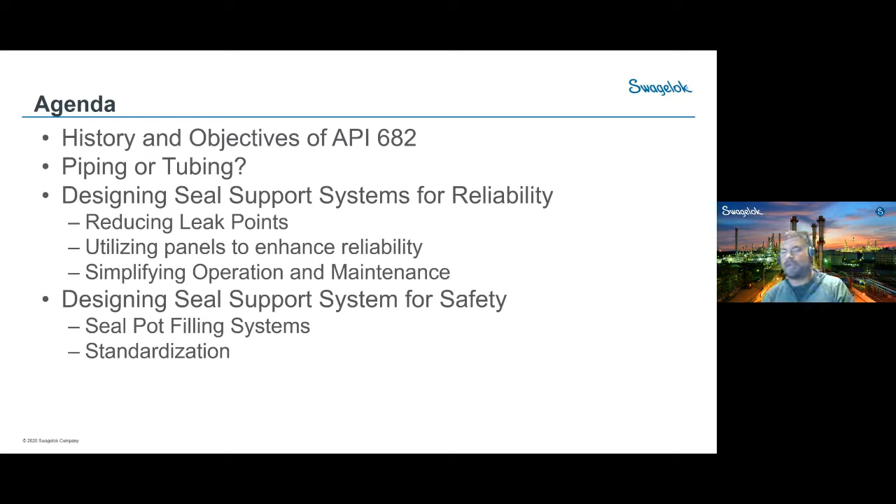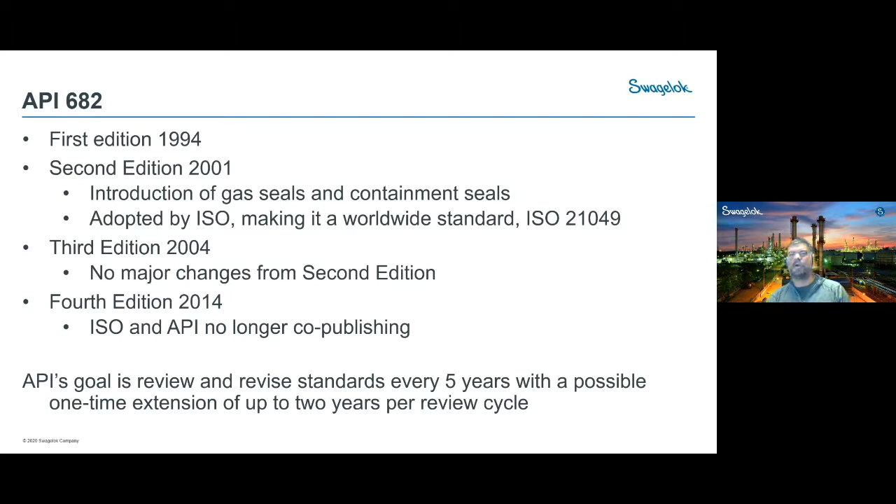Okay, just a brief history on API 682. It's only about 20 some years old. 1994 was the first edition. For a period of time, ISO and API were collaborating. They are no longer doing so and not co-publishing any longer. So really what we have is kind of the global standard right now. I don't hear ISO referenced so much, pretty much around the world. Anybody dealing with petrochemicals is discussing API 682. All right, we're expecting a new version of the standard sometime in 2021, 22. They really try to update that about every 5 years.

Okay, I think the first thing when we talk about 682, that's a good thing to start with, is that it's not a code. It really is a place to share best practices. A lot of guys will say, hey, we got to follow exactly what's in API 682, but I think what we'll talk about in this presentation is a little bit about where you may decide to deviate or make changes or improve upon some of the suggestions in API 682. All right, we always start with API because it is the gold standard for seal support systems. And then if we deal with an ANSI application, some chemical plants will have that, both API and ANSI applications.

The discussion here is relevant for ANSI systems as well. You just may be able to change some of the componentry around, as typically ANSI service is not as heavy duty as API service.

As you know, Swagelok does not make a pump, does not make a mechanical seal. That is not our core competency. What we are really good at is designing and building systems like seal support systems for the conveyance of fluid and gases.

So basically anything 2-inch and under is in the wheelhouse of what Swagelok does. So today we're going to focus on really the seal support systems, which is a key aspect of seal integrity itself. I look at two sections, section 8, which gives me all my guidance on what type of accessories I need to use and key considerations for things like sizing, seal pots, etc.

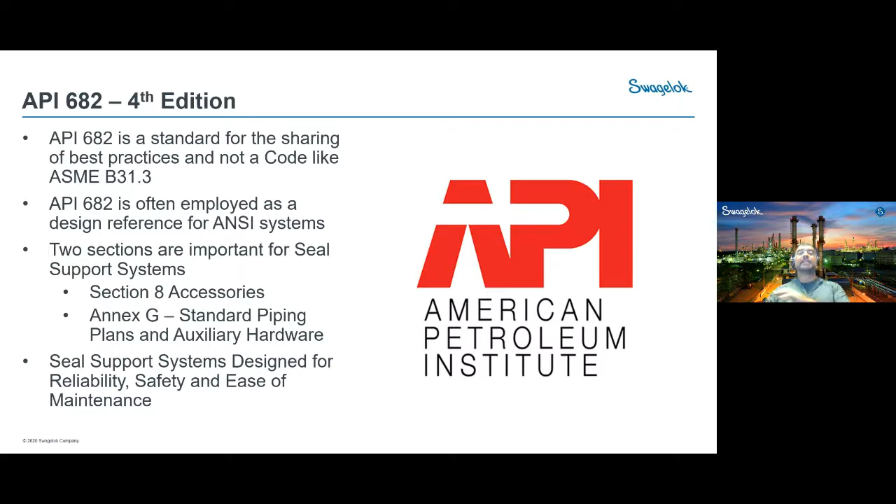Throughout the entire standard, there's a big focus on designing these systems for reliability, safety, and ease of maintenance. So three big considerations for us there.

I did want to highlight one thing because we are seeing tubing being used in these systems quite often. This is an article from Hydrocarbon Processing, by a gentleman I worked with, Heinz Bloch. He's fairly well known in the industry, worked for Exxon for a number of years, and is a real guru of rotating equipment. He's a real advocate for using tubing in seal support systems.

So when you look in the back, it says piping plans. Well, now designers have a choice: do you want to use piping or do you want to use tubing? And certainly we see the major seal manufacturers and pump vendors using a lot more tubing.

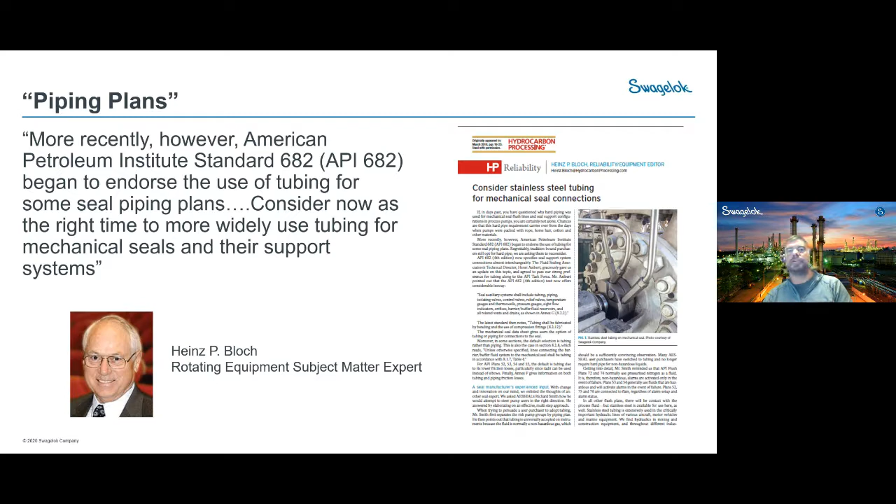This is traditionally a little bit heavier wall than we use for the pressures and temperatures we would typically see in seal support systems. API likes to beef up the wall a little bit, use a heavier wall tubing not for pressure containing inside the tubing, but really for external robustness. These are around pumps, equipment, and they certainly don't want a guy putting his hand or foot on something. So they really want to have external rigidity with that extra heavy wall thickness.

I bring it up here because if your guys are going into the storeroom and just grabbing tubing, they just want to pay attention to the wall thickness and not grab instrument wall thickness tubing, which would have a thinner wall on it. You'll also notice there's no guidance for tubing below 1/2 inch.

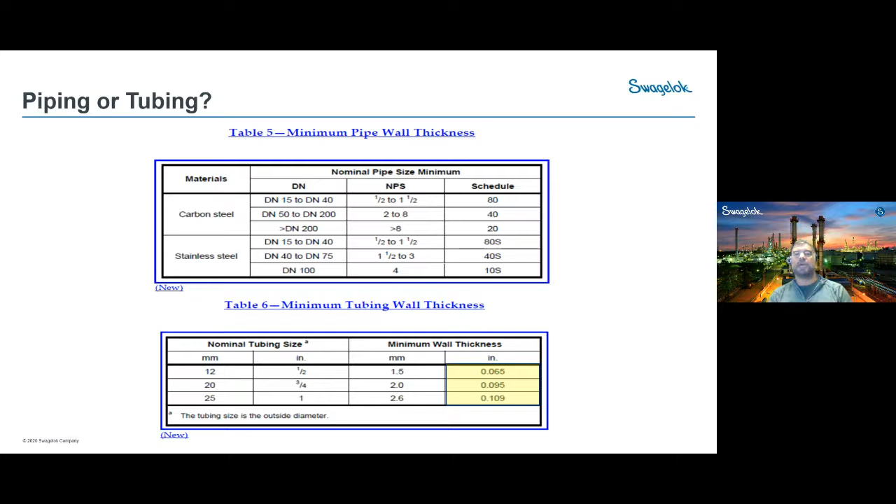That we typically see on gas seal plans like 72s and 74s. We just size that wall appropriate to the pressure and temperature service. And same goes for over 1 inch. We have a lot of OEMs using over 1 inch tubing on compressor systems or pump systems, and then we just size that wall appropriately for whatever application they have.

Well, it's an orifice and a strainer. So I look in the back. One of the things below the ISO diagram that I find very helpful is the text that they have talking about considerations for it. One main consideration for this design is that it has not been proven to have a 3-year successful operating life.

Does that mean that we shouldn't use this plan or we can't use this plan? No, that's really not what it means. It's just saying, hey, pay attention here. There's probably something on this design that needs servicing, and in this case, it's going to be the strainer. That's a reliability concern. If we don't have the proper preventative maintenance plan to blow that down, it can become clogged and then affect the flush flow in my plan 12.

So I always look in the back just to see, hey, are there maintenance considerations with these plans?

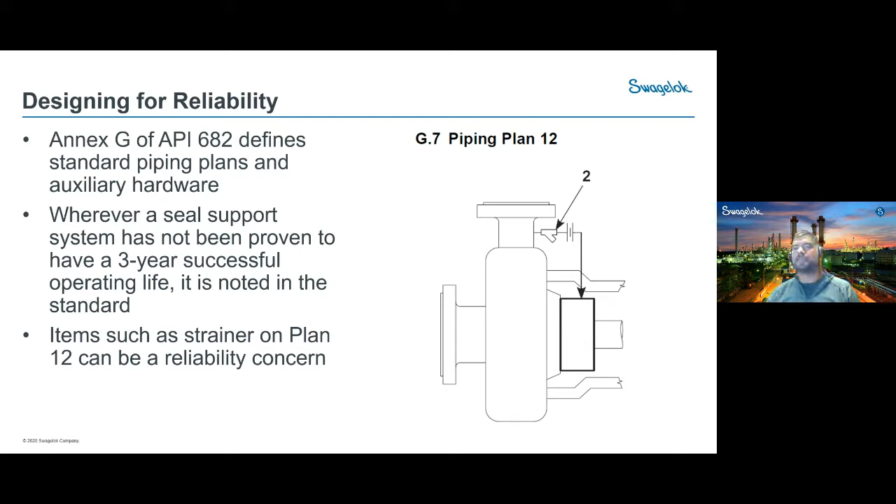With designing for reliability, we want to reduce leak points wherever we can. That's a big concern. Whenever I go throughout the world to Asia or Europe, we're always looking at reducing any potential leak points. So we want to always look at these designs and say, hey, where can I engineer out potential leak points?

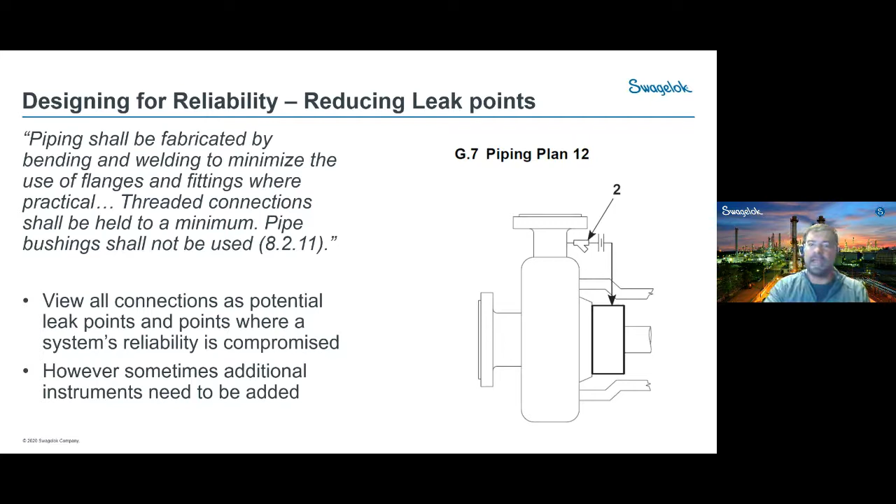However, we also want to consider that these systems don't have to be static, and sometimes I might need to add additional instrumentation. Just because API says it's this way in the back of the book, if I'm having problems with this system, it might be necessary to add additional instrumentation. So I'll give you an example here.

This is a plan 12. This was at a customer site. They had to change the design because they had issues with that strainer clogging. So for a period of time, they added gauges on either side of the strainer to measure how frequently it clogged, and they found that it clogs about once every 3 months. So they wrote the preventative maintenance down so that they would blow that strainer down every month or two.

After they diagnosed this problem, they removed those gauges, reduced those potential leak points, and plumbed right back into that strainer. So it's quite possible to think about API as, this is the way we want it to be, but at some points I may have to actually add additional instrumentation as a diagnostic tool. And then there's no problem removing that later once I've figured out whatever we need to figure out.

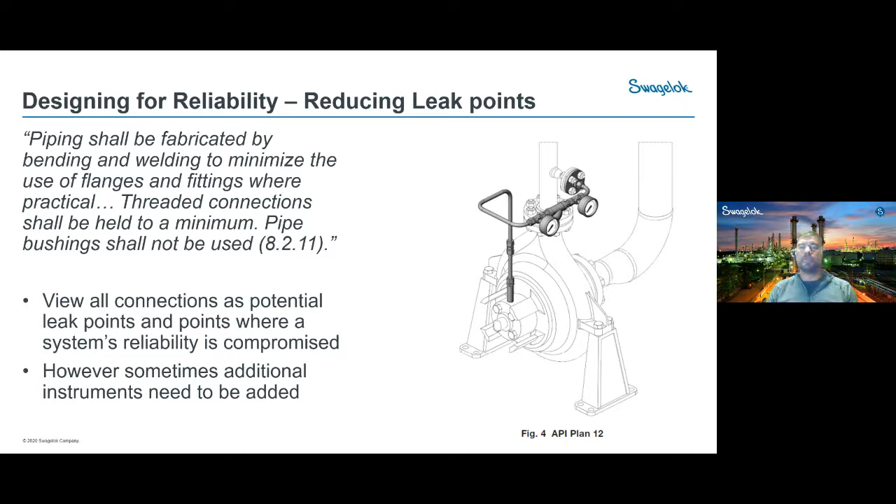Just to give you guys some more pictures, this is from a fracking field in southeastern Ohio where they're taking gas out of the ground, doing a little bit of light separation and processing before putting it into a pipeline. This plant was less than a year old, and already I'm seeing some issues. They were having some problems around pumps, even in a relatively new plant.

What you're seeing here is a 5211, so it's a seal pod on the left, and then you can see here I've zoomed in on the 11. Sometimes the gas was not clean. They had particulate in the gas coming out of the ground, so they had plan 11s that were clogging.

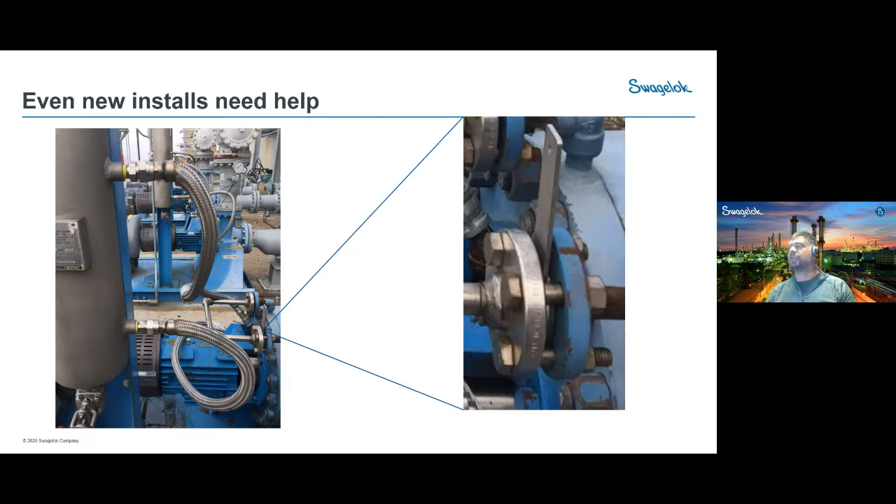Again, we see a plan 11 is just an orifice. If that clogs, the only way they knew about that would be to have a seal issue. So there's an opportunity there to add additional instrumentation if they were having clogging issues.

Next thing I'm looking at here is the connections into the seal chamber from the 52. We've got 1, 2, 3, or 4 fittings there. Again, we always want to use one fitting whenever possible, as few connections as possible around here.

We certainly don't want this to leak, especially in days like we're having today, where it's cold overnight, freezing, and then it thaws during the day. That expansion and contraction works at pipe threads, loosens them, and then you do get leaks. And this is really not a great place to have a leak.

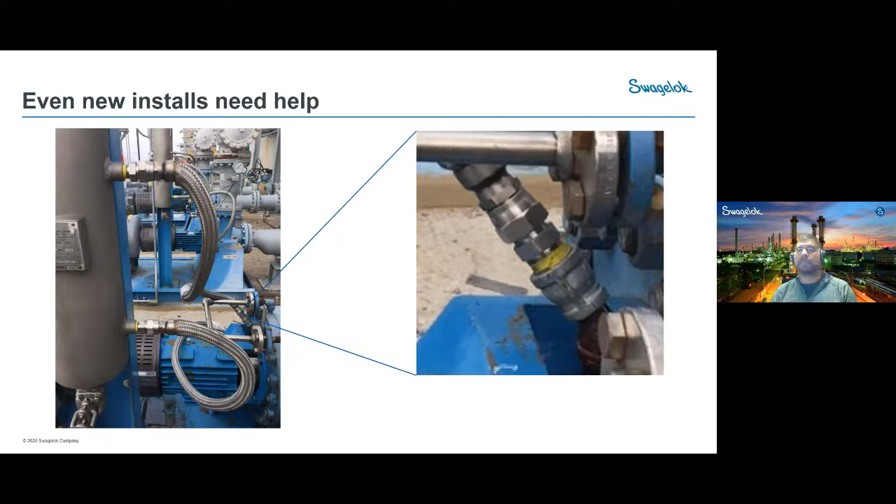And certainly the last thing I'm looking at here is this hose. API does not recommend using hoses in these applications. You can use them in ANSI, but for API, we always want to use rigid piping or tubing whenever possible. I don't know when that hose is going to fail. I just know it will fail at some point.

Certainly the routing of the hose is an issue, but whenever possible, just try not to use hoses in these applications. They are wear items. They are going to fail at some point.

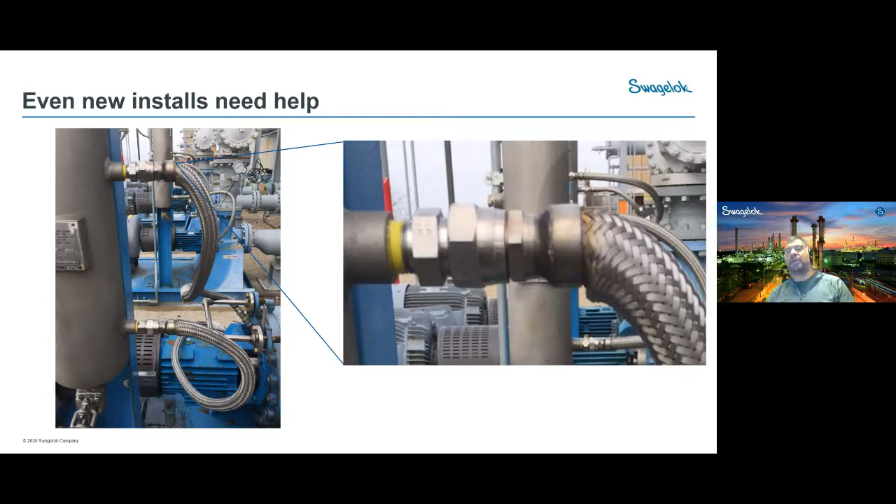So in pursuing elimination of leak points, just make sure your guys have the appropriate fittings. When you're out there reconnecting, putting a seal back in, hooking up a flush system, there are products out there that help you eliminate leak points, single fittings that make the transition. Try to equip all your people with that instead of having them just go to the back of their truck and pull out whatever they have and cobble something together.

That picture in the middle there, they're using a hex coupling and then a tube fitting. That could be done in one fitting. Why introduce additional fail points if they're not necessary?

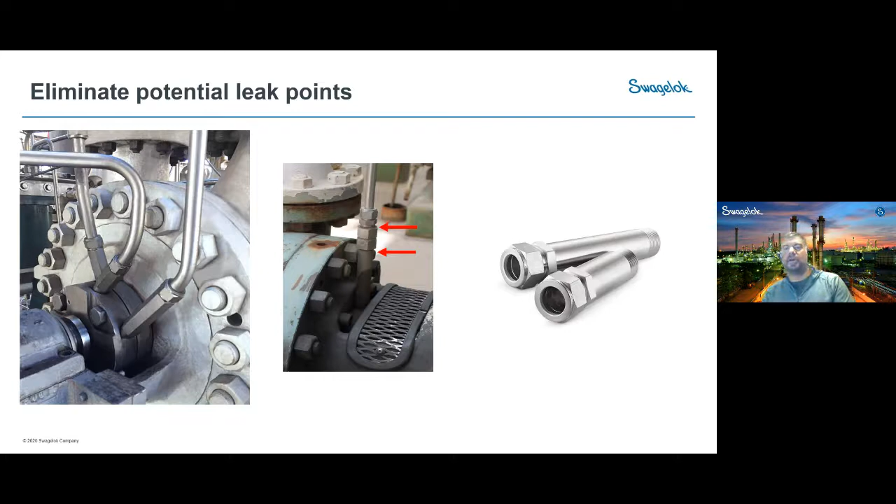And in eliminating leak points, I also look for places where somebody maintaining a system could have an issue. So what I'm looking at right here is where they've welded together a piece of piping to add a thermometer. Now, the dangerous thing here for me is, what if that thermometer fails and somebody puts their wrench on the thermowell and unthreads that accidentally instead of just the thermometer? This is a potential safety and reliability concern, because there's an additional leak point where somebody could accidentally disassemble it.

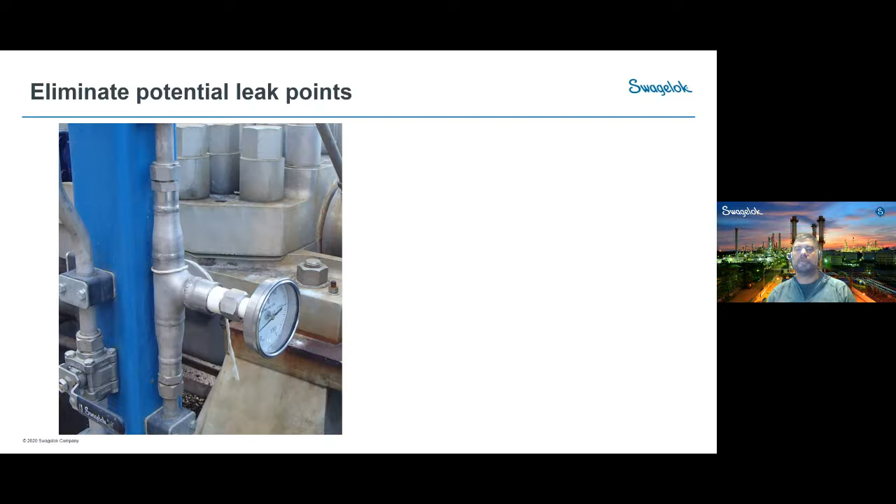Look for ways to add temperature or instruments where they can be safely isolated, block, bleed, or not able to be disassembled. So we look at situations where you can use a fitting to add a gauge, where you have the thermowell welded into the fitting.

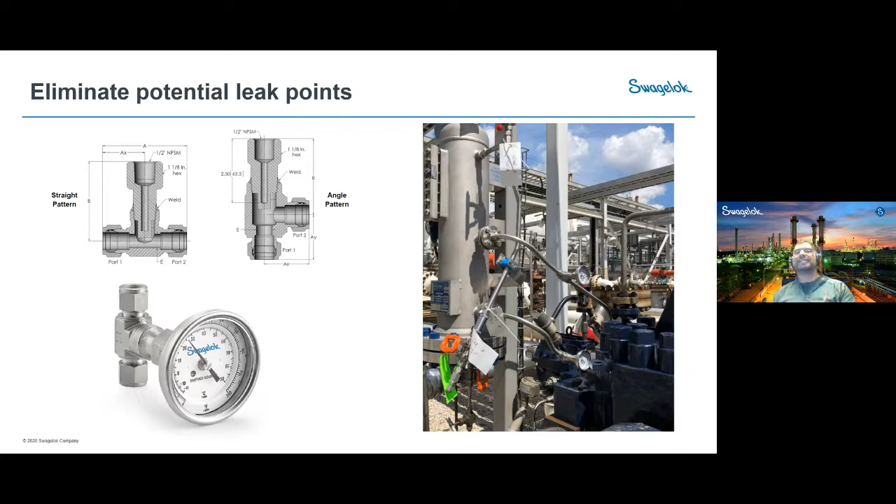On the right here, I'm looking at a Plan 52 where they've added temperature monitoring to the inlet and outlet of the seal pod. Now that's not recommended in API, but this site felt it was important, instead of having guys walk up to these systems and put their bare hands on the tubing to judge whether they're getting the right flow in and out of the seal pod, why not just add temperature measurement so guys can look at it easily when they walk up to the pump. So even though this isn't recommended in API, the site found value in it and decided to deviate to add that extra information.

One other thing in API around instrumentation that's relatively new is the recommendation to add block and bleed valves to everything, even our gauges. While this may sound like a no-brainer, I've seen tons of process gauges threaded directly into process piping with no way of isolation. Then that gauge eventually fails over time, and it's stuck there until there's a turnaround or a project where things can be removed and taken out of the system.

You can see here, this is a between bearing pump. We've got orifices on either side of that T coming out the discharge, so they've added gauges there to monitor the pressure drop across those orifices. Best practice right here, they've added a way to block and bleed those gauges off. The instrument is only as good as its ability to be used and replaced if it fails, so make sure we're considering how this is going to be serviced.

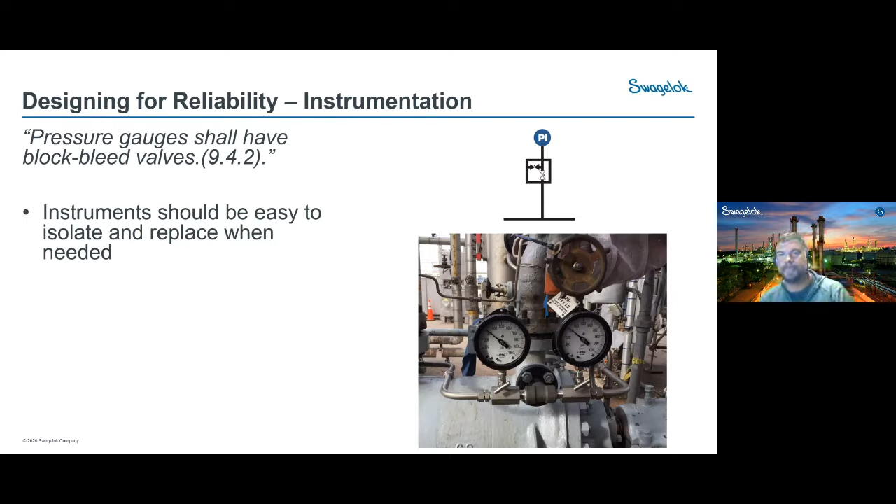All right, Rich, I'll let you do a little explaining on this slide here. All right, thanks, Sean.

So locally, we've been able to help our customers out with gas sealing systems, in particular Plan 74s and Plan 7276s.

Some of the nice things that we've done for our customer that exceed the requirements of API 682: we have a bypass arrangement set up on the flow meters, so you can bypass the flow meters and do calibration work on them, and some additional testing needle valves that we've added so they can go around and verify that the system is working well.

One of the other nice things about these particular panels is they're very compact, and they also utilize not just Swagelok product, but also customer-specific products such as Rosemount transmitters and Brooks flow meters that are explosion-proof. One last really nice thing for those who require compliance to TSSA, these panels do have a Category H registration, so they basically install like a fitting into your system.

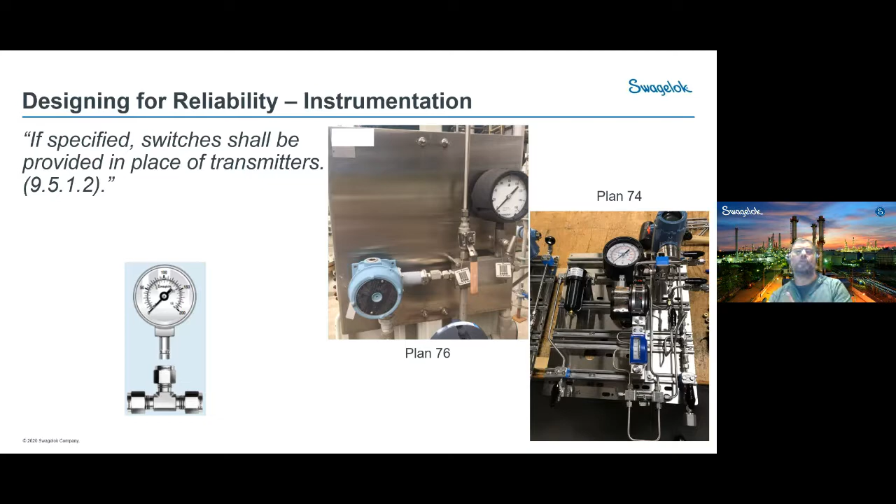So when there's an opportunity to use certain things like drop-in gauges with tube stubs, so positioning's easy, removal's easy, use that to your advantage to make this stuff easy to service for your guys. Every little barrier we put in front of somebody to either read the panel or service the panel should be viewed as a reliability concern.

We want to make all this as simple as possible. Okay, so again, designing for reliability. There's a section in the standard about incorporating vents and drains, and that should be a no-brainer, right? Some of these require vents.

What I'm looking at here is a 53B, and what I've highlighted is the connection from the unit to the pump itself. I want to talk a little bit about the location of vents and drains, because oftentimes what gets specified is, if I'm upgrading from a single to a dual seal, I need this type of seal plan, I need a 52 or a 53. It arrives on site, and then we say, okay guys, hook it up.

Well, without an engineer drawing or a kit of parts, we're just leaving a lot up to chance. What are the odds that somebody's going to put in the low point drain and high point vents right where they're supposed to be? So if we forget this opportunity to actually help them install it correctly, we're doing a disservice to the whole system. It's only going to work if it's hooked up correctly.

And I've been out on sites where I see an inlet and outlet mixed up on a 52. So why not provide the guys with an engineer drawing and a kit of components to show them, hey, here's exactly where we want those high point vents to go.

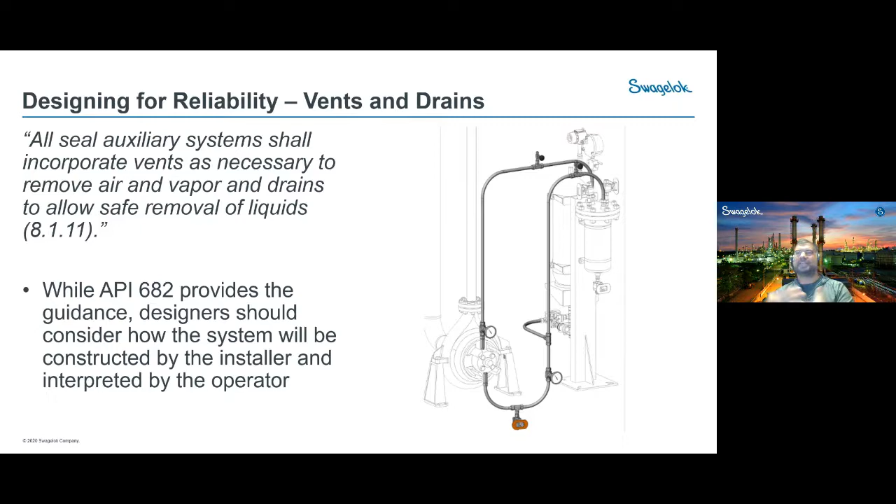Because if they don't include them, how are you going to bleed air off in the system? If you get a slug of air caught in your seal chamber, you could easily dry run your seal. Maybe the air gets trapped in the chiller and reduces the efficacy of that. So don't just consider that I got the pump and I've got the seal support system. Think about how are they going to get put together and installed.

Okay, this is one of my favorite pictures that I saw in the field, designing for safety. There's a focus throughout the standard of having everything visible to operators at eye level. So immediately I'm looking, it looks like a little bit of a disaster, which it is. It's a Plan 32, believe it or not.

So down in the lower left here of this slide, I have the ISO diagram that shows you what should be on a Plan 32. And this is the reality on the right, that picture there. That's exactly how it gets built when guys are cobbling stuff together.

All right, you've got a hose coming down, right? It's got to do a 90 turn through a Hedland flow indicator, which, by the way, is at the base plate of the pump. So what do you think the odds are somebody doing their rounds are going to get down on their hands and knees to look at the flow through that? Then it's got to come up through a rusty strainer, a hard 90 through my rusty check valve, and then I have a half-turn ball valve for flow control.

So not a very safe installation, and certainly we don't want to use a ball valve for flow control. It's just pieces cobbled together. There's no indication that it's a system, so lots of room for improvement here.

I always think about these systems too as what happens when I have a turnaround or a project and I have people unfamiliar with these systems coming onto my site. Am I leaving it like this drawing here, this picture here, an opportunity for somebody to open or close that ball valve because they don't know that it's being used as flow control? So these are the things we need to think about.

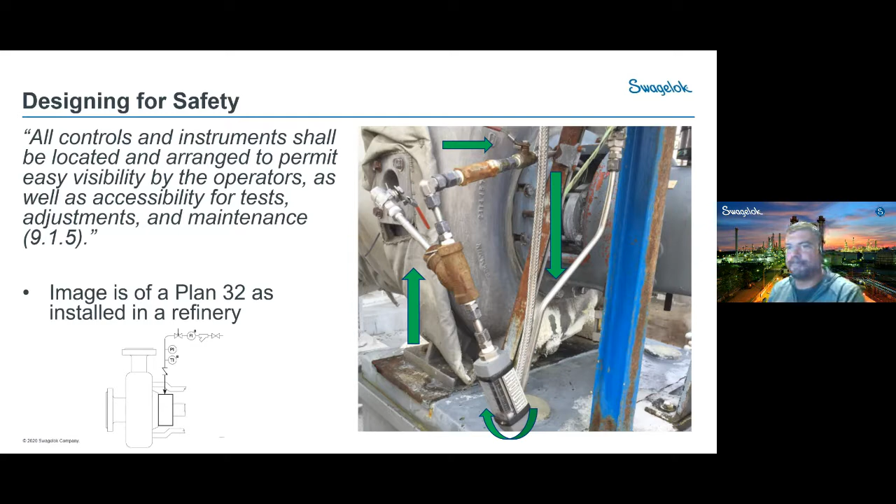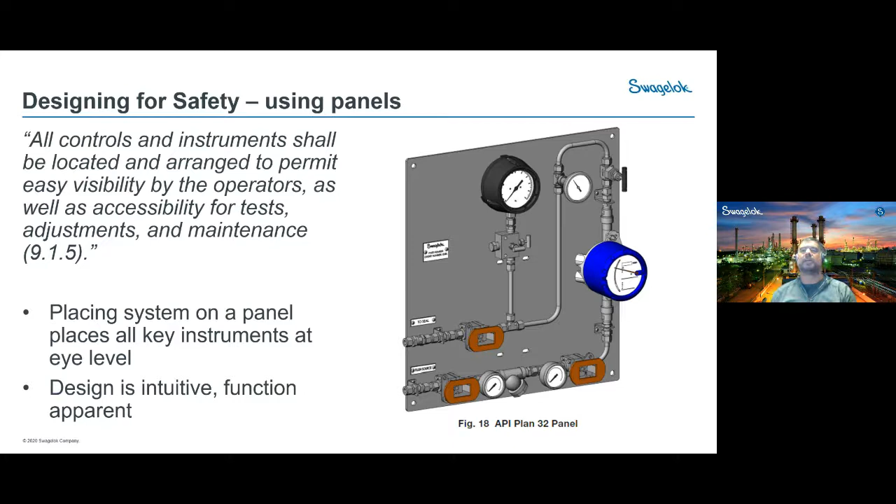Put it on the panel if you can. API wants everything visible to the operators for test adjustments and maintenance, right in front of their faces. We want everything up away from the pump so they're not having to get down on the ground to inspect something. Plans like 32 really benefit from being placed on a panel because now it looks like a system. I've got all my key instruments there, flow, pressure, temperature, just right at eye level, so I can quickly assess what's happening. I can change the regulation with my needle valve, block and bypass the strainer if it needs to be serviced. The design is intuitive and the functions are apparent by walking up to it. You can see labeling right there telling you what's inlet and what's outlet.

Speaking of labeling, I took a picture of this gas panel. It's a 74, to show the power of what labeling can do, something we forget in the design process but should be considering. This 74 is flowing dry nitrogen into the seal for a dual seal pump. You've got 55 pounds on the gauge, do not adjust, and on the flow meter they noted at 5 standard cubic feet an hour, write the maintenance order, and at 10 they will change the seal. It's their way of reminding themselves: at 5 this is failing, at 10 they'll have to replace it.

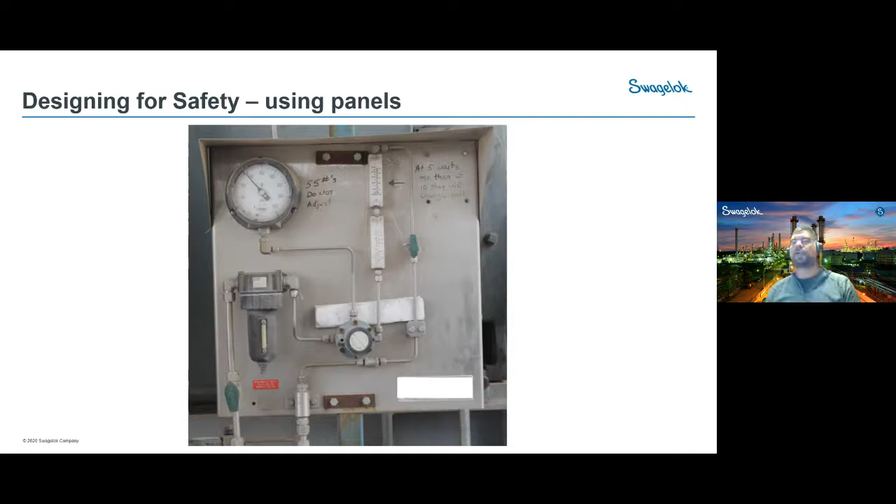So magic marker is one way to do labeling, a little Sharpie pen. But I think if you look at this example, you can take this to a whole other level by using a variety of techniques. You can just affix labels on there. Here, what you're seeing is a vinyl wrap, the same vinyl wrap they do on cars. We've done extensive salt spray testing at our factory on this vinyl wrap. It does not fade, it does not delaminate or anything like that. It's a good option because you can print whatever you want on there.

So this here is a 7276. Just through colors right away we've denoted that there's a system difference and a material difference. The 72 is clean dry nitrogen, that's in white, and the 76 is going to take the nitrogen as well as normal process leakage and take it to flare. On an ISO stripper this could have acid in that line, so they want the 76 portion out of Monel. Immediately walking up to this, I've got my material designator printed on there as well as a color coding so I don't get stainless and Monel mixed up.

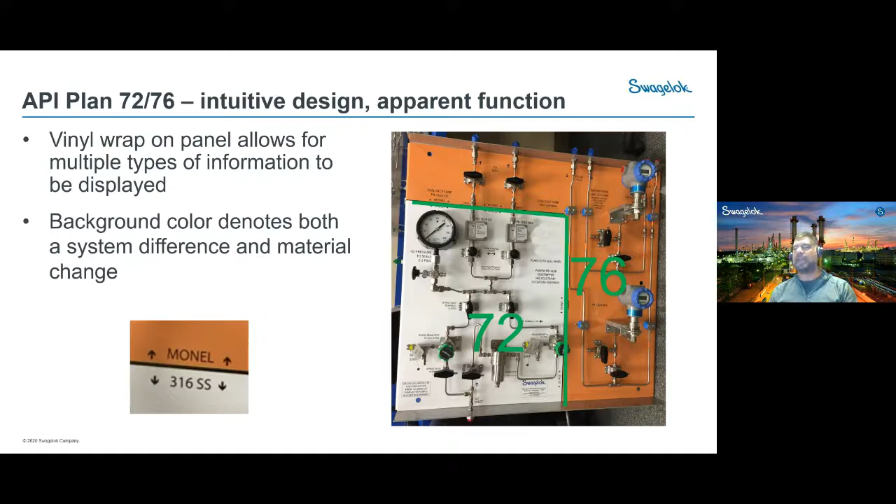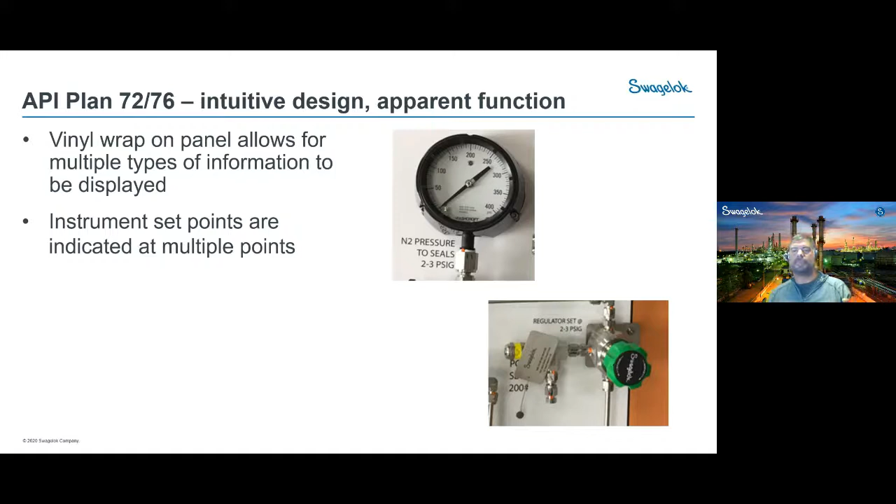What else can we do on the labeling? What else is on here? Instrument set points, right? At the gauge, you have 2 to 3 psi for the nitrogen to the seal. You have that same information on the instrument that controls that, the regulator. So how many places can we put this so it's double checked? Same information, and what about other options?

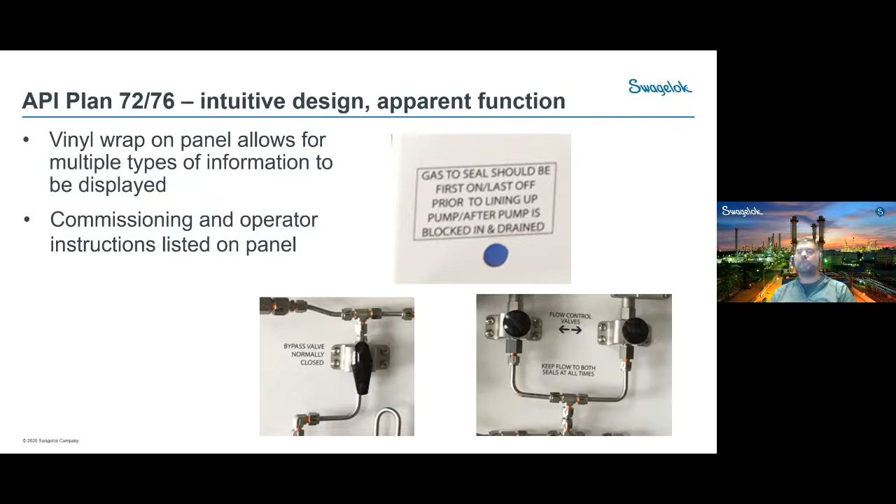Bypass valves are labeled, flow control valves are labeled, and the more we work with customers, the more we're learning that commissioning is a dangerous time for seals and support systems. So even putting commissioning instructions on here can help improve safety and reliability. You can see here they say gas to seal should be first on or last off. It's a reminder to make sure this panel is operating and on before we turn the pump on, because typically if they don't have this correct, they're going to damage the seal. Maybe that seal won't fail completely, but instead of getting 5 or 6 years out of it, now you're getting 2 or 3. So consider putting as much information, even commissioning instructions, on or near the panel or pump, so people can reference that during projects and outages.

One of the last examples I'll cover is filling seal pots. In my time traveling as a market manager for Swagelok in the chemical refining business, I've seen probably thousands of 52s, and they're all filled differently. The current recommendation from API is to have the fill from ground level. The old way, and the way a lot of places still do this, is to climb up on a ladder, take the pipe plug out of the top of the pot, and fill it from there with a bucket or a little hand pump or something like that.

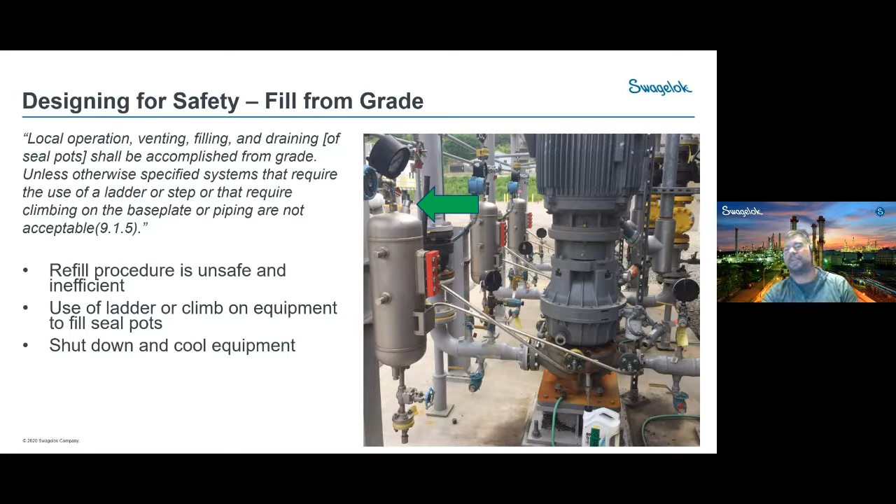But as you'll see at this refinery, that was an inefficient process. It took them a long time to go down, set up the ladder, climb up and do that. They didn't want people on that ladder. It was a fall hazard.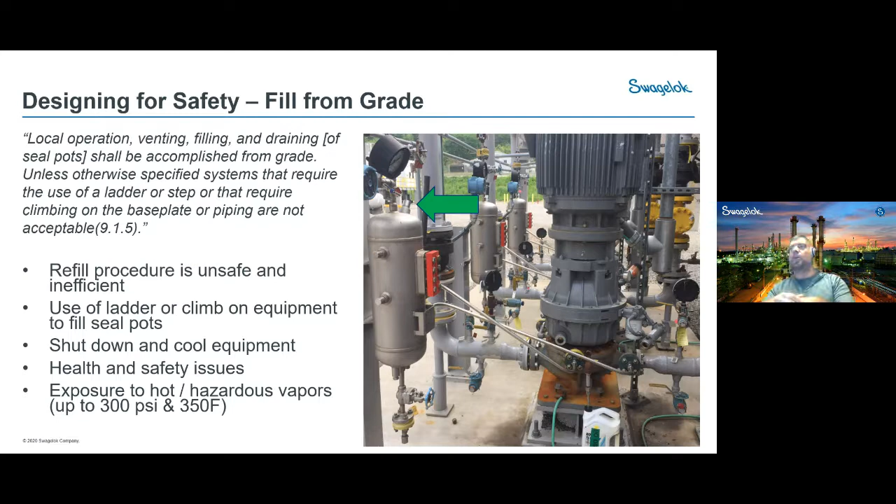So what can we do? What if you just retrofitted the pot with a fill assembly? In this particular refinery, over time, they installed this valve array and tubing array on the side of every pot. They had pots from EagleBurgmann, John Crane, or Flowserve, so there was no standardization on the pot, but what they did standardize on was the fill assembly on the side of the pot. Now every seal pot is filled exactly the same way.

They're able to take a cart, wheel it up, hook it into the bottom of that tubing array, and pump it up into the top of that pot. They don't have to take the system offline, break into it in any way, no exposure to vapors, and everybody's doing the fill from the ground level.

So when we talk about standardization, these are the types of, to use a term, low-hanging fruit or easy wins that we try to involve ourselves in, where significant progress is made on reliability and safety over a period of time, without having to shut down massive pieces of equipment.

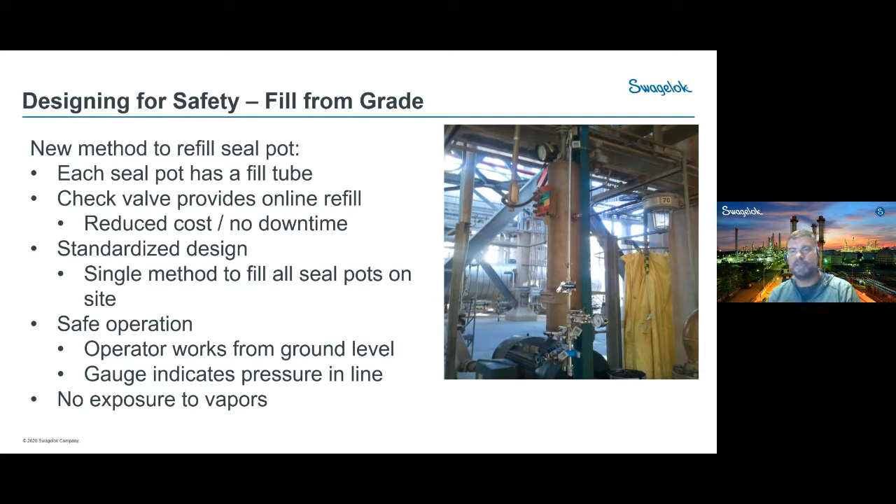What we did is, over the course of about a year or two, retrofitted every seal pot in this facility with this array. So it wasn't something instant, it's a journey. Standardization is a journey, and it can start with little things like this. So now we always incorporate that standard design of a fill assembly on the side of all of our seal pots.

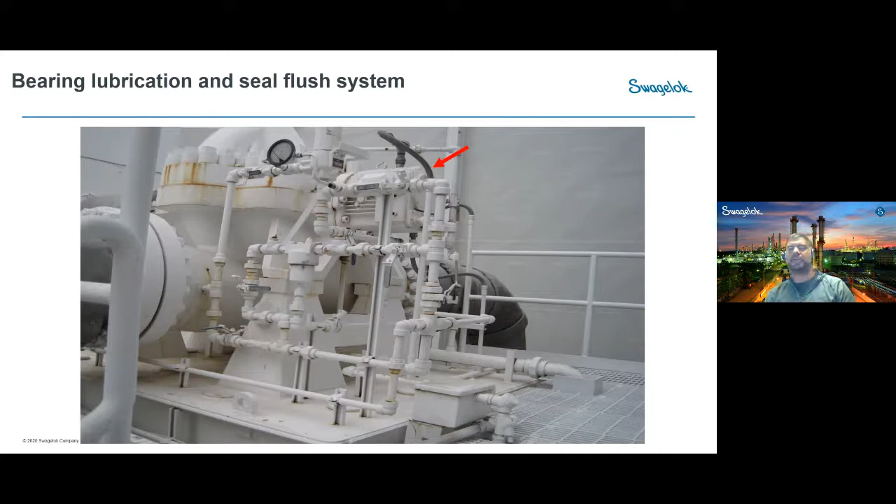So this is the exact same pump, but with a tubing system installed on it. They gained a couple things here. First of all, you can see it's super easy to access the bearing housing now. Just swing those two pieces of tubing out of the way, pull the cover off, and I'm into the bearing. So, dramatic reduction in the time to work on these types of systems. Then they went from carbon steel to stainless steel, so they didn't have to have an extra contractor come on and paint it. Their maintenance team thought, well, it's much easier to get to the filter now.

I can actually tell it's a filter, and I can block and bypass it, change it when needed. And then lastly, in terms of reliability and longevity of the system, they're not sure they're going to have to replace it anytime soon. The other one, they would have had to replace in 5 or 10 years.

This time we've profiled the tubing around the pump at places of low vibration, so it hugs the pump and vibrates in tandem with it instead of off to the side like the pipework did, which shook itself to pieces. So this is just one way you could implement tubing on these systems to replace pipework and address a maintenance challenge, which was really not even related to the flush system. It was more related to the bearings. I thought I'd give you that case study as an example.

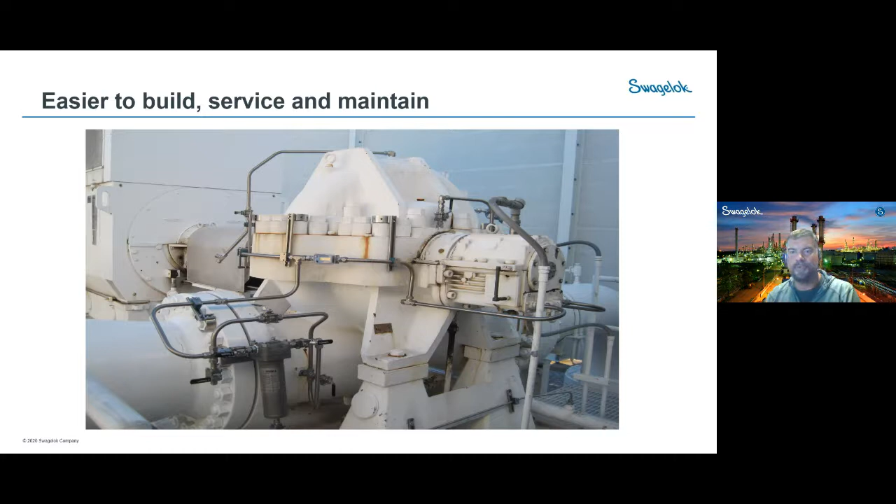Okay, so just to wrap up, thanks everybody for your time. There are advantages to tubing, and certainly reach out to your local sales and service center, and Richard here, if you have questions on how to implement tubing in these systems. But really, the big concerns are designing for reliability and safety.

Let's just take a moment when we look at these systems and not think of them as something that arrives from our seal vendor and is going to work perfectly. It's got to be connected, it's got to be maintained, and it's got to last for a long time. So how do we simplify operation and maintenance through better design?

Okay, I'll take any questions now if anybody has any questions. Let's see here, Sean, let me have a look. And there's one new question here.

The question here from Anonymous is, how will a mechanical seal support system perform on a pump and seal that appears on the edge of its design limits?

Oh, that's a tricky question. So without getting into any specifics, I often think of a seal support system, and really the seal itself, as the initial warning sign that something's not correct. So if something's operating at the edge of its design limits, and you're seeing seal failures, the first thing we'll do is root cause analysis. Why am I getting failures in this system? And then if it's traced back to something such as the seal or the support system, the questions are: do I have the right seal, and in the support system, am I getting the appropriate flow and temperature control?